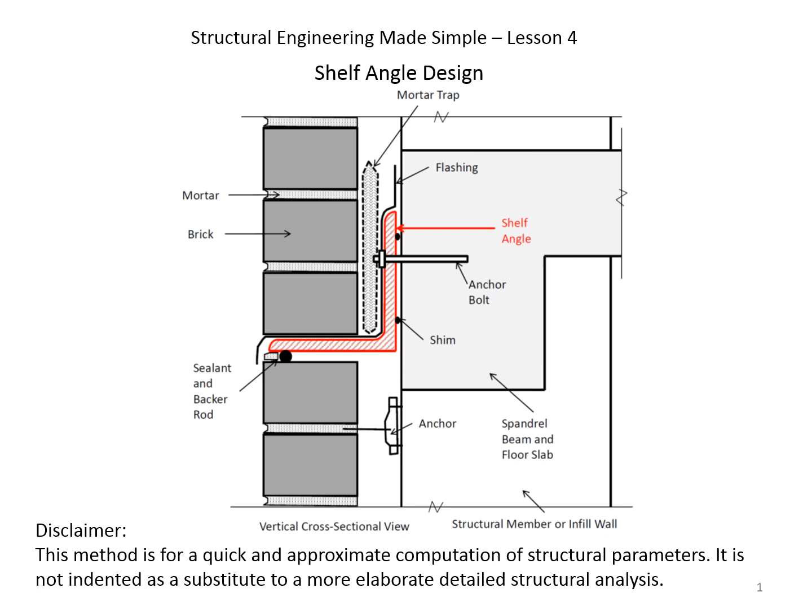Shelf angles, also referred to as steel relief angles, are secured to the structural system and are designed to provide support for facades such as veneer walls. Usually they are installed at every other floor level. Therefore, each shelf angle carries the weight of 2 stories of the veneer wall.

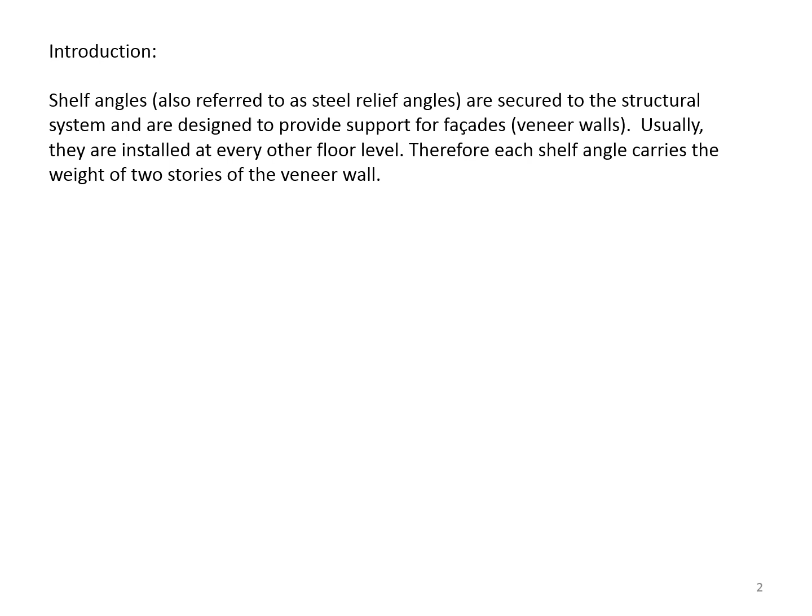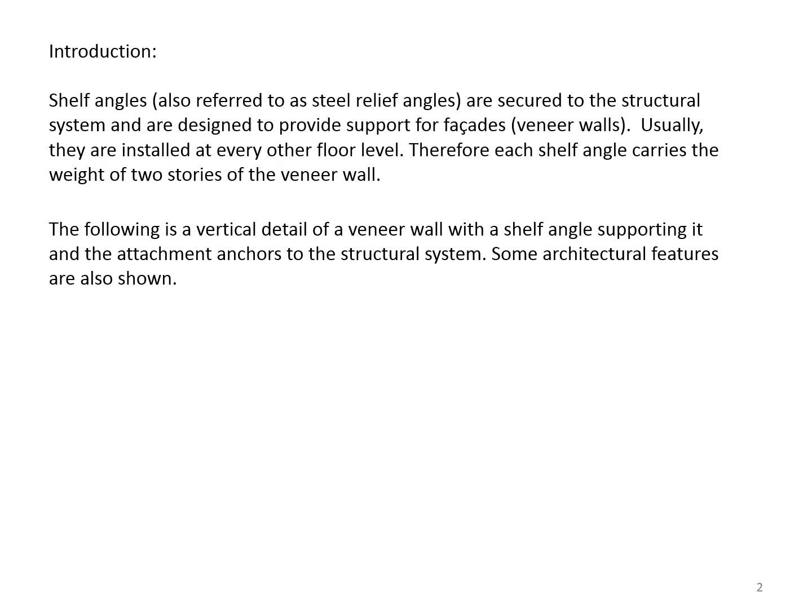The following is a vertical detail of a veneer wall with a shelf angle supporting it, and the attachment anchors to the structural system. Some architectural features are also shown. Here is a shelf angle shown in red, and the anchor bolt securing it to the structural system. Architectural features shown are the sealant and backer rod, the flashing, and the anchor to prevent wall movement.

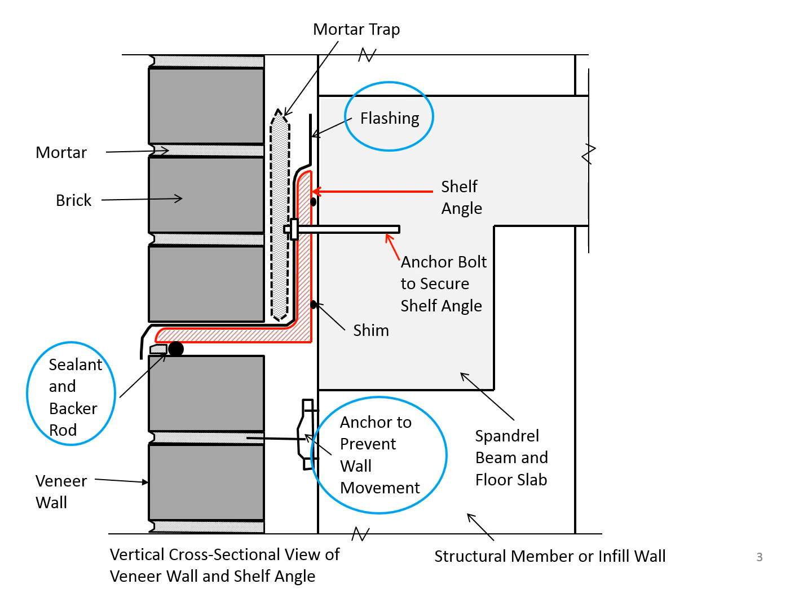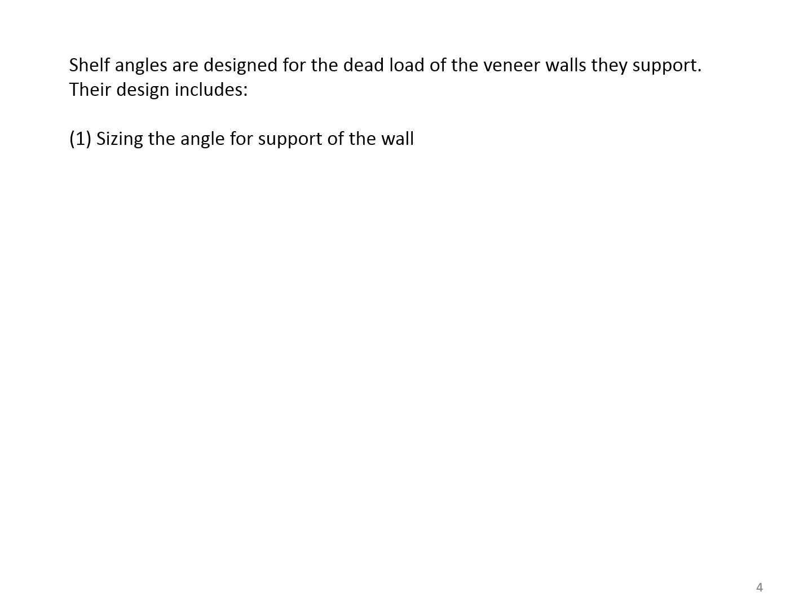Shelf angles are designed for the dead load of the veneer walls they support. Their design includes sizing the angle for support of the wall, designing the angle for proper thickness, and designing for the connection that attaches the angle to the structural system.

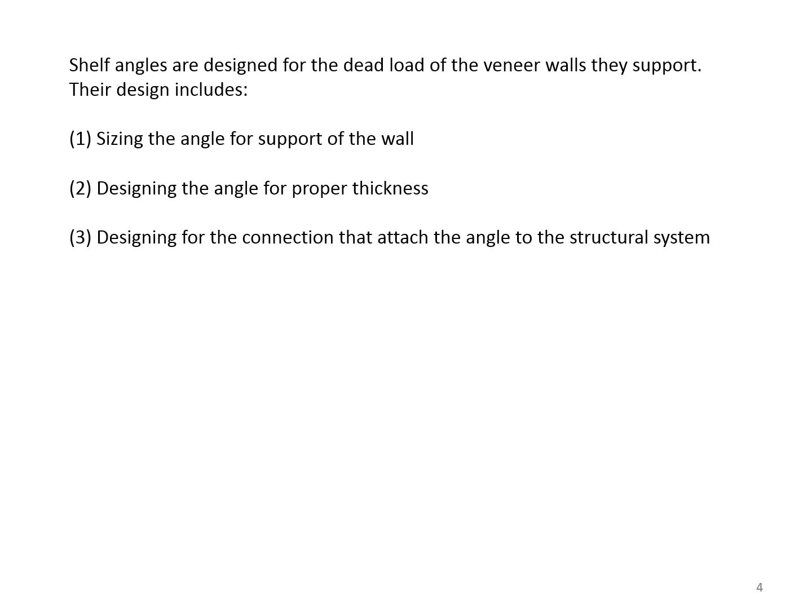When the supporting structural system is a masonry wall or a reinforced concrete frame, the attachment of the angle to the structure is achieved by using anchor bolts. Proper design of the anchor bolts requires selecting the anchor cross-section diameter, embedment length, and the spacing between anchors.

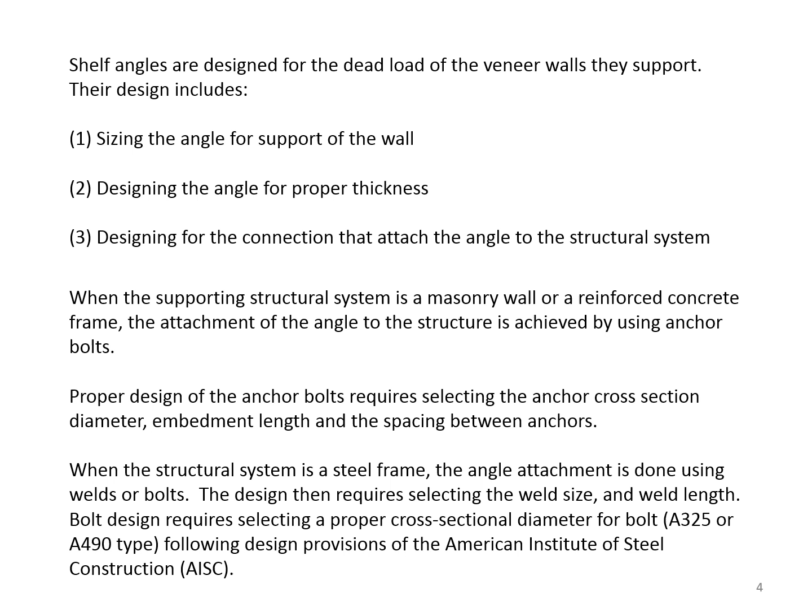When the structural system is a steel frame, the angle attachment is done using welds or bolts. The design then requires selecting the weld size and weld length. Bolt design requires selecting a proper cross-sectional diameter for bolt, A325 or A490 type, following design provisions of the American Institute of Steel Construction, AISC.

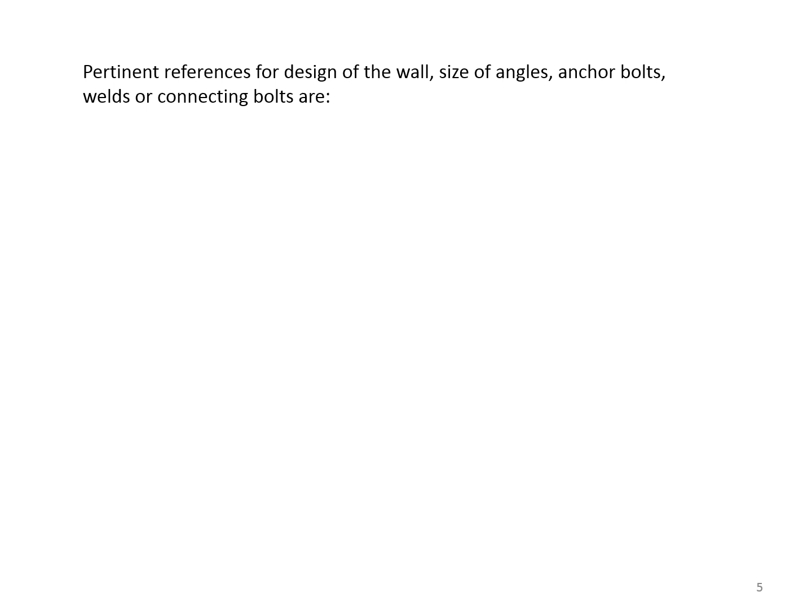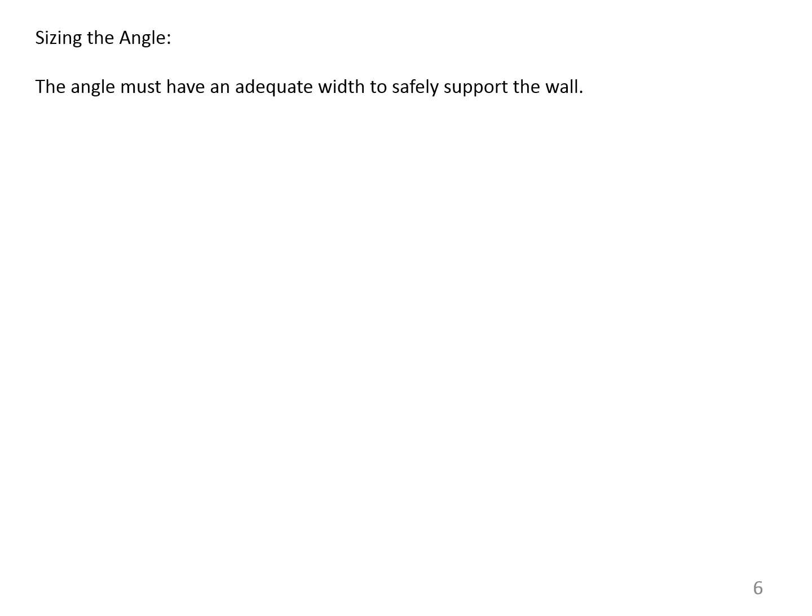Sizing the angle. The angle must have an adequate width to safely support the wall. In the longitudinal detail shown below, notice that the weight of the masonry wall is treated as a uniformly distributed load. The anchor spacing is S, and the edge distance, that is the distance between the center of the last anchor and the end of the shelf angle, is shown with S sub E.

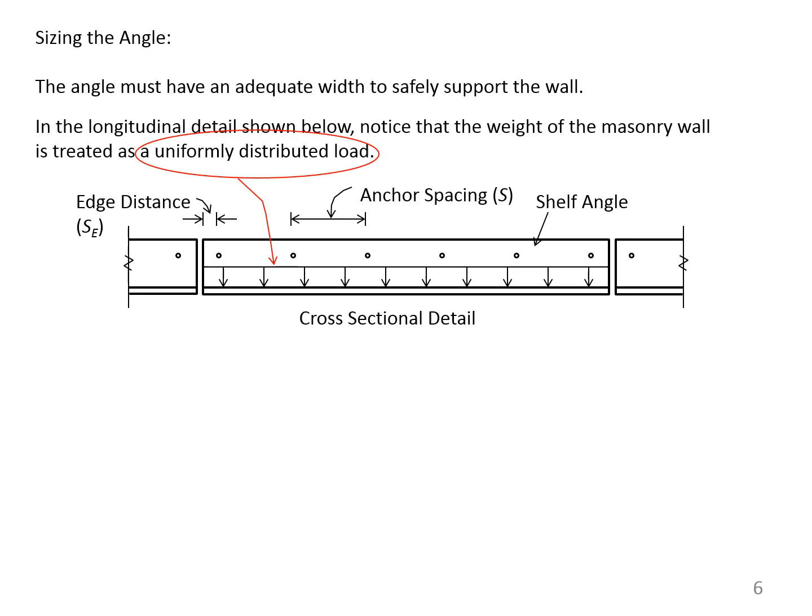And here is the cross-sectional detail of the shelf angle. Notice that the load from the weight of the wall is acting at the tip of the outstanding leg of the angle. We're going to talk about this a little bit more later. Also notice the forces in the angle. There is a tension in the anchor and there is a shear in the anchor. Furthermore, there is a compression at the bottom on the support.

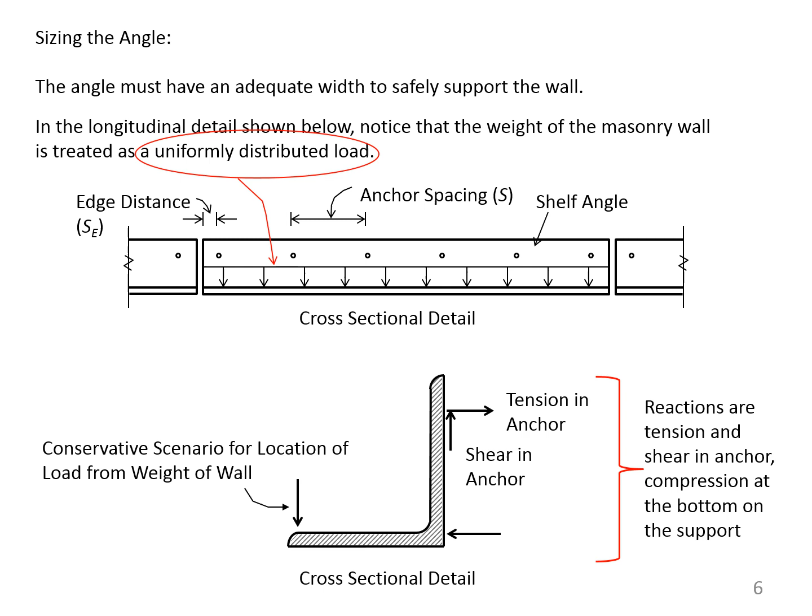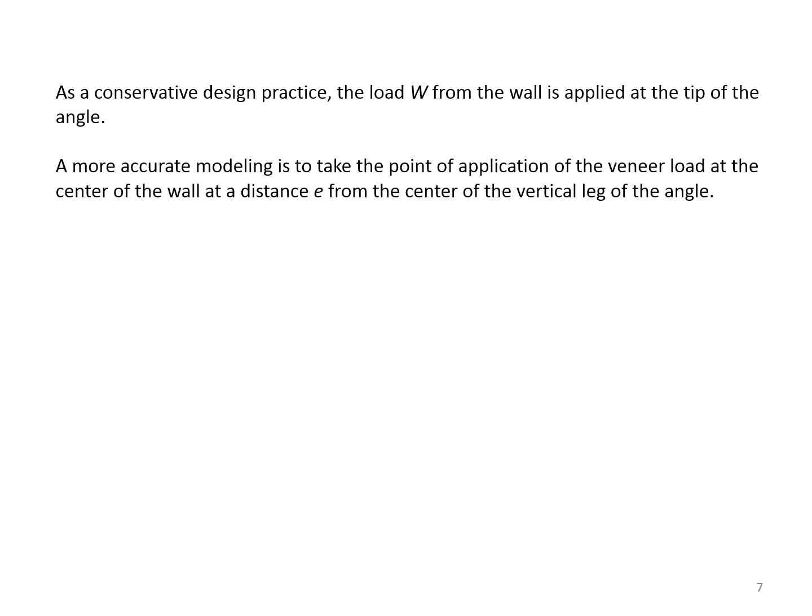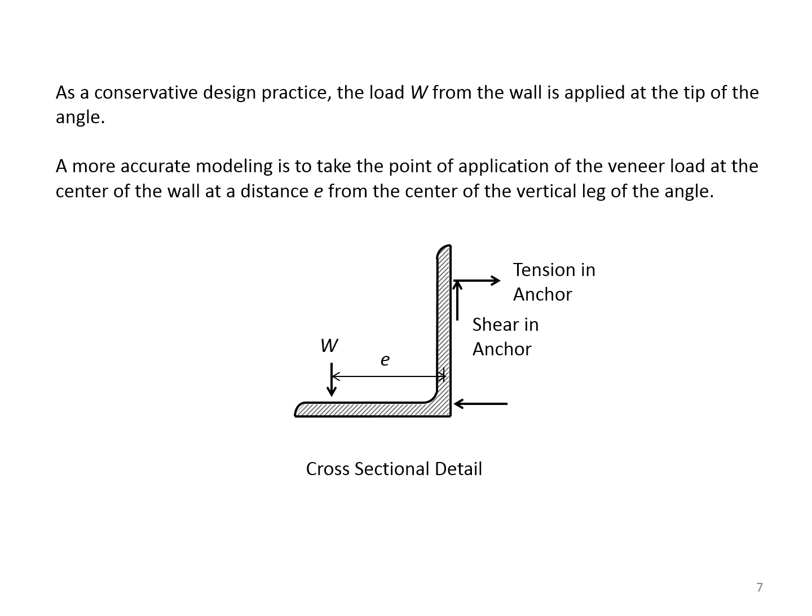As a conservative design practice, the load W from the wall is applied at the tip of the angle. A more accurate modeling is to take the point of application of the veneer load at the center of the wall at the distance E from the center of the vertical leg of the angle. This is shown in this figure. Therefore, the determination of dimension E is important.

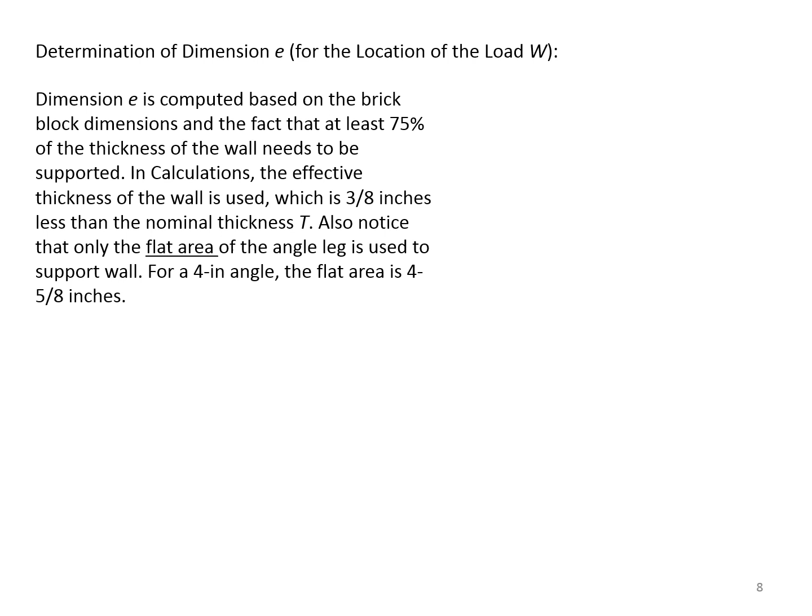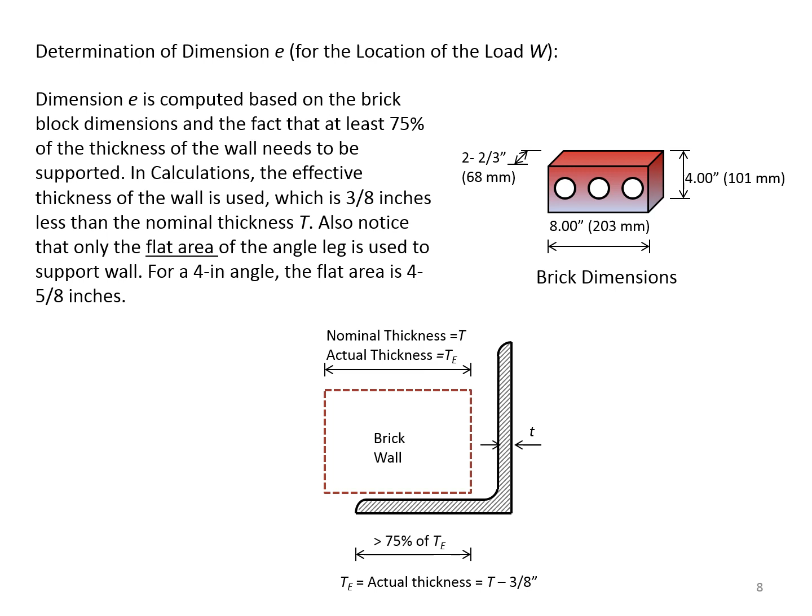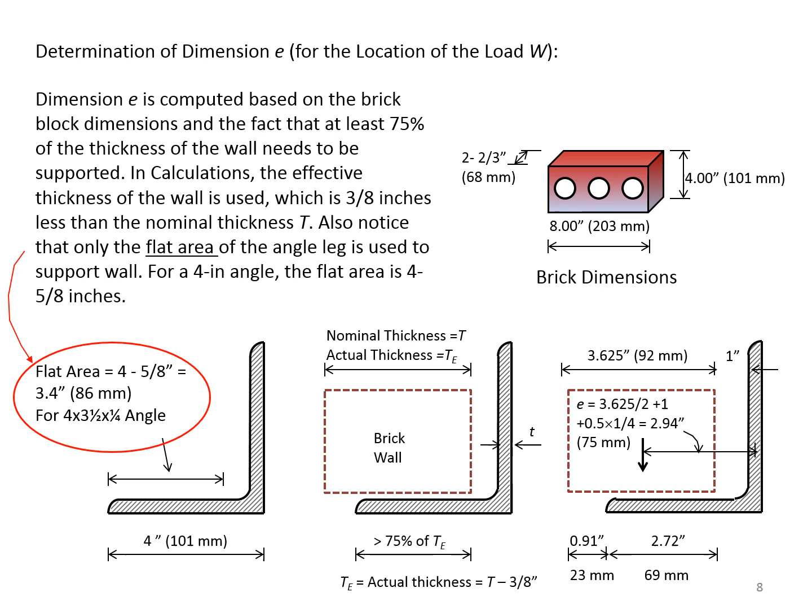Finally, when we put these numbers together, we should be able to determine that dimension E. We're going to talk about this a little bit more. So again, for the 4-inch angle, in the example we provided, considering that the 75% of the effective thickness needs to be supported, we can compute and find out whether we have enough area, the flat area, to be able to accommodate the 75%. The effective width of the wall is 4 minus 3/8 of an inch, so it's 3.625 if it is a 4-inch thick wall.

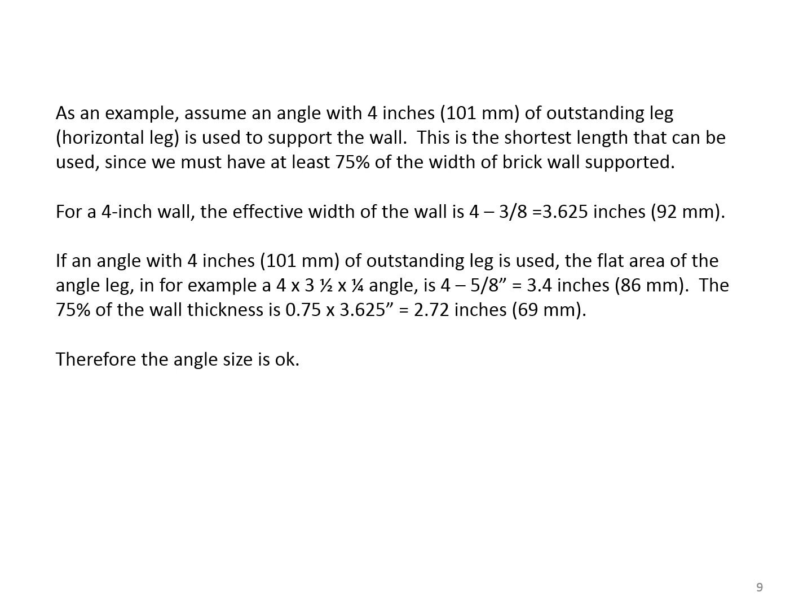If an angle with 4 inches of outstanding leg is used, the flat area of the angled leg is 4 minus 5/8 of an inch, which is 3.4 inches. 75% of the effective wall thickness is 0.75 times 3.625, which is 2.72 inches. Therefore, you notice that the angle is okay. We only need 2.72 inches and we have 3.4 inches of area.

However, this condition provides only a very small gap area between the veneer wall and the inner faces of the vertical leg of the angle, about 1 inch. In practice, this gap is wider and is about 2 inches. In this situation, certainly a larger angle size, for example, an angle with 6 inches of horizontal leg, will be needed.

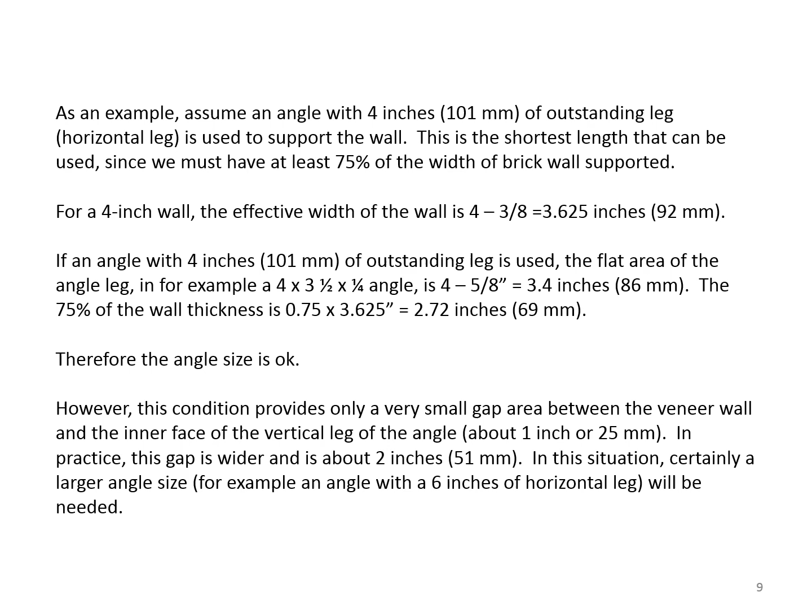Here we provide the detail again, and you notice how the 2.94 is computed. Please notice that this dimension is measured from the center of the thickness of the vertical leg of the angle.

Also, if you are looking for this dimension, 5/8 of an inch, to compute the flat area of the angle, for other size angles you need to consult with the AISC manual.

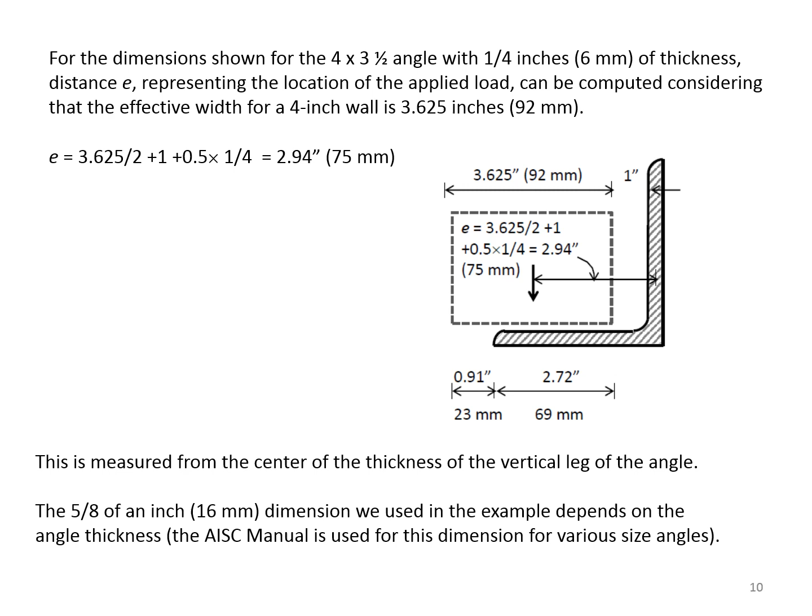In general, if a cavity gap equal to little c is used for an angle thickness equal to little t, and the effective wall thickness of t sub e, the distance e is te divided by 2 plus c plus t over 2. Obviously, with a larger cavity gap, the size of the angle will need to increase.

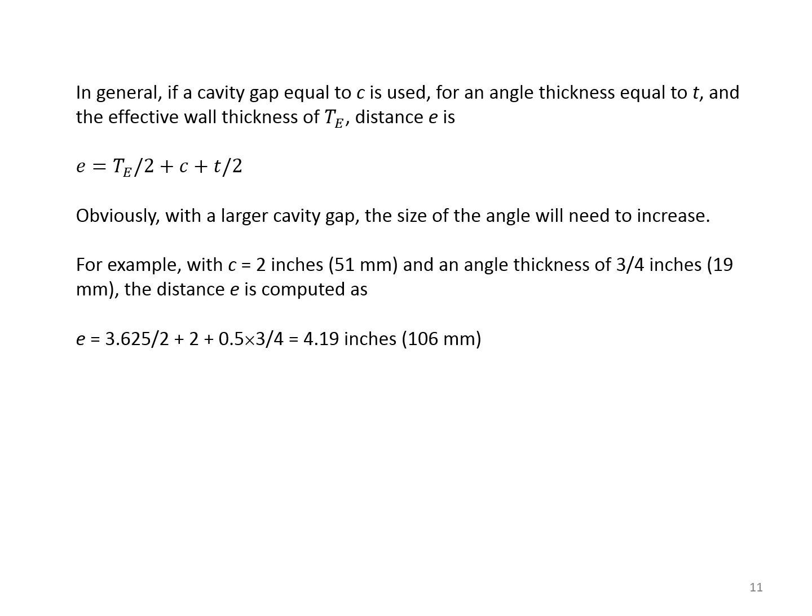For example, with c equal to 2 inches and an angle thickness of 3/4 of an inch, the distance E is 4.19 inches, and certainly we need at least an angle with outstanding leg of 5 or 6 inches to accommodate this.

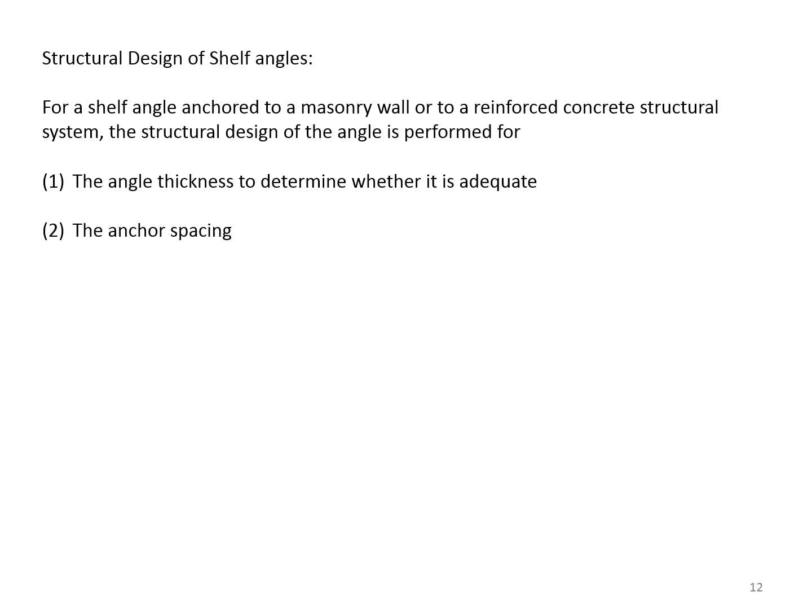Structural design of shelf angles. For a shelf angle anchored to a masonry wall or to a reinforced concrete structural system, the structural design of the angle is performed for the angle thickness to determine whether it is adequate, the anchor spacing, and the size and embedment length needed for anchor bolts. In this video, we only cover items 1 and 2.

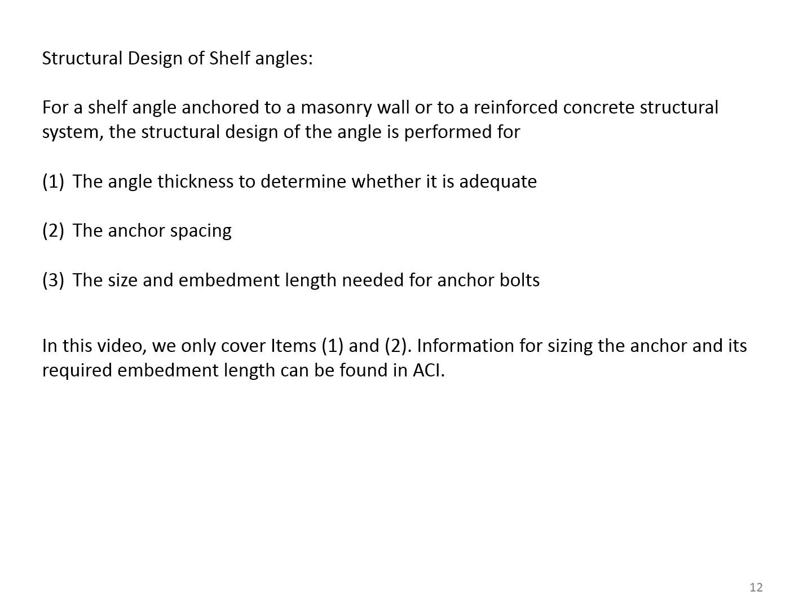Information for sizing the anchor and its required embedment length can be found in documents from American Concrete Institute, ACI.

Here is a detail showing design parameters for a shelf angle. Notice that the total load is a uniformly distributed load over the length B, which is equal to 4T. B is the effective length of the angle. It is taken as 4 times the thickness of the wall. However, it cannot exceed S, which is the spacing between the anchors.

To the right, you notice another detail showing a cantilever system. This is a cantilever idealization of the outstanding leg of the angle. We use this one in order to determine the required thickness of the angle. The cross-sectional area of this cantilever is a rectangular area b times t. t is the thickness of the angle.

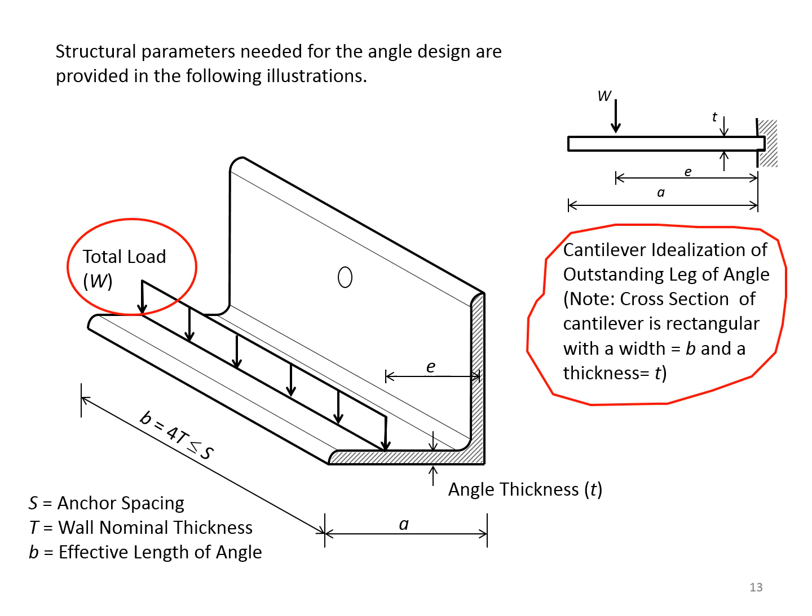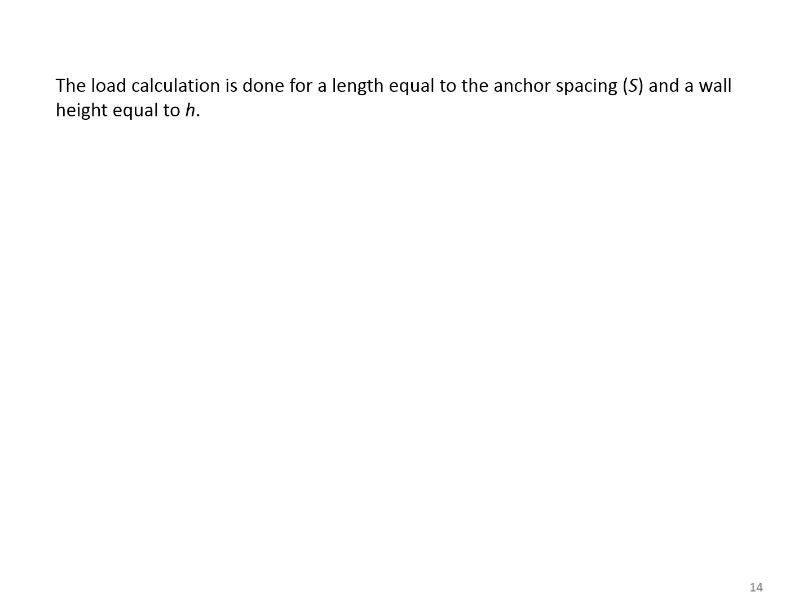And also notice that the load, which was acting at the tip of the angle, is now moved to an inner area at the distance E from the support. The load calculation is done for a length equal to the anchor spacing S and a wall height equal to H. However, calculation of all cross-sectional properties are conducted for an effective angle length of B. And as we indicated before, B is equal to 4 times T limited by S.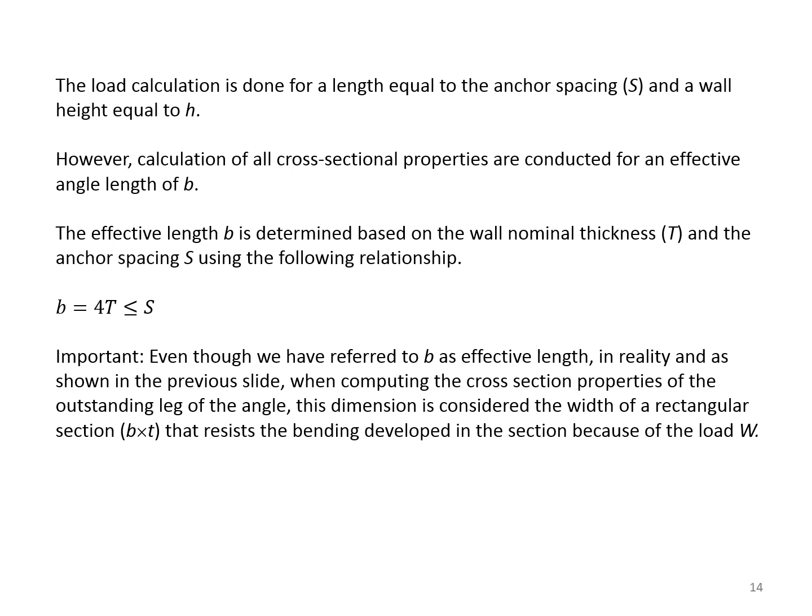This is an important point to remember. Even though we have referred to B as effective length, in reality, and as shown in the previous slide, when computing the cross-sectional properties of the outstanding leg of the angle, this dimension is considered the width of a rectangular section B times T that resists the bending developed in the section because of the load W.

And again, notice that for the purpose of computing the required thickness of the angle, the outstanding leg of the angle is treated as a cantilever beam under the load W.

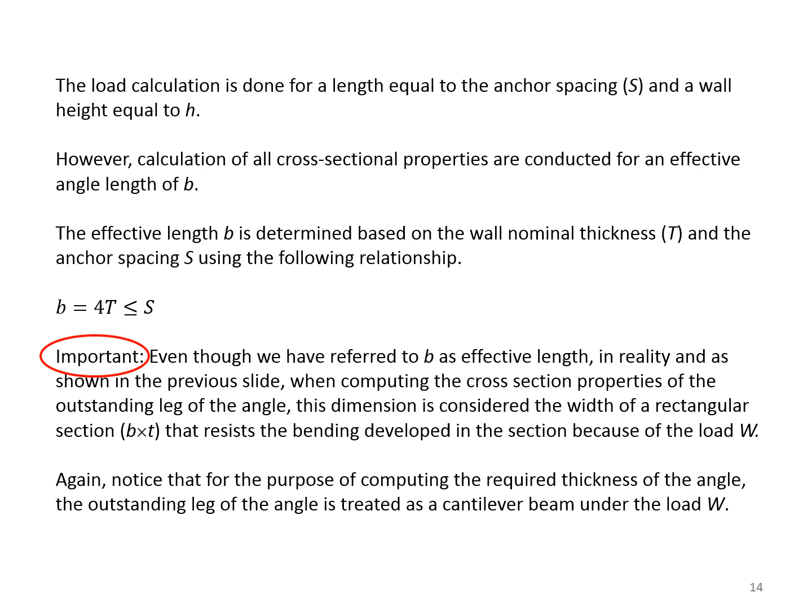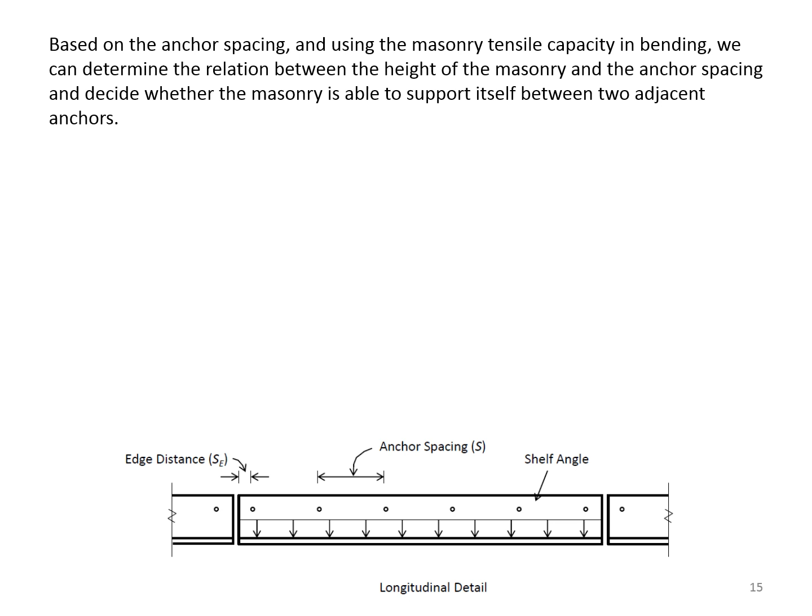Based on the anchor spacing and using the masonry tensile capacity in bending, we can determine the relation between the height of the masonry and the anchor spacing and decide whether the masonry is able to support itself between two adjacent anchors. As was shown in the longitudinal detail, which is again presented below in a smaller scale, the wall weight is a linear load assumed uniformly distributed.

Considering a wall with a height of h spanning over a distance s between two adjacent anchors, the uniform load from the wall and the bending moment developed are: the load is q equal to omega h, bending moment m is equal to q s squared over 8, which is equal to omega h s squared over 8. In these equations, little omega is the wall density, and for a 4-inch thick wall is usually around 42 pounds per square foot, and h is the wall height.

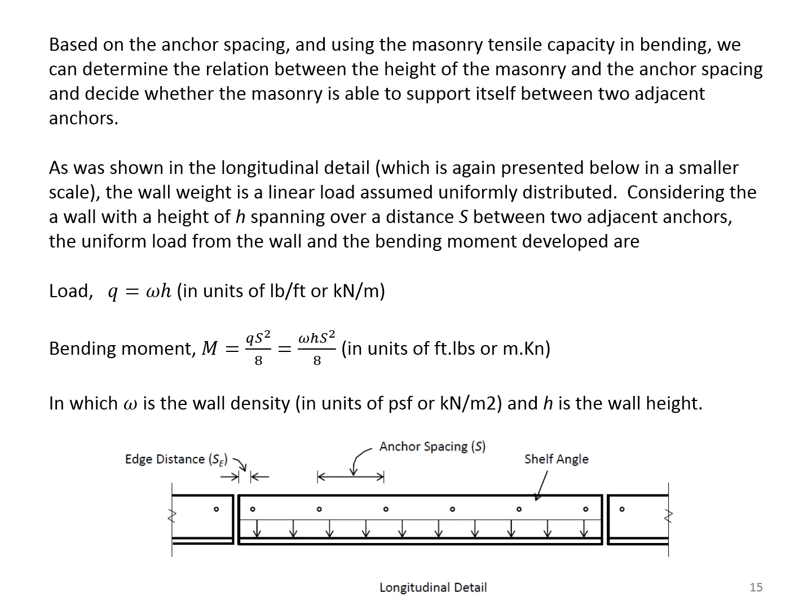Notice that the wall vertical cross-section will resist this bending moment M. For a wall with nominal thickness T, the effective thickness Te is T minus 3/8 of an inch, and the section modulus would be Te h squared over 6.

The bending stress at the vertical cross-section of the wall, which would be affecting the mortar, is little fb equal to M over Sx, which is equal to 6 omega s squared divided by 8 Te h.

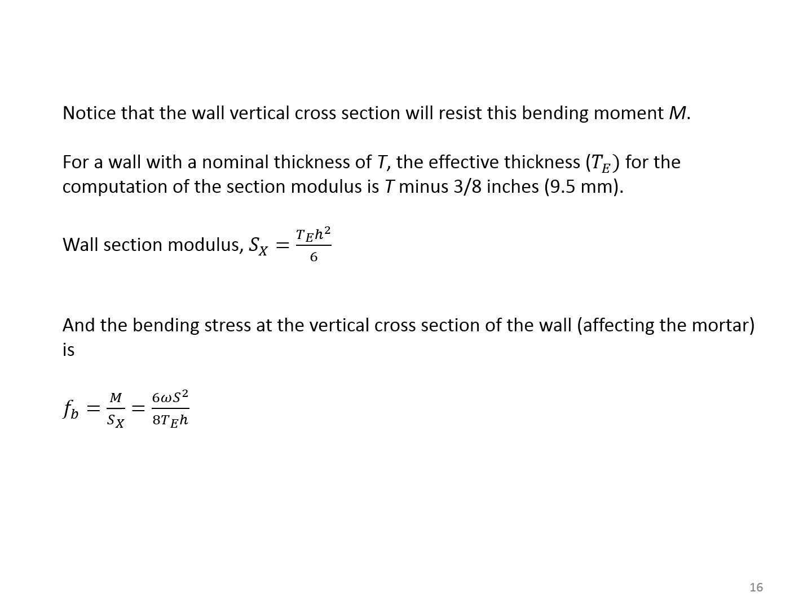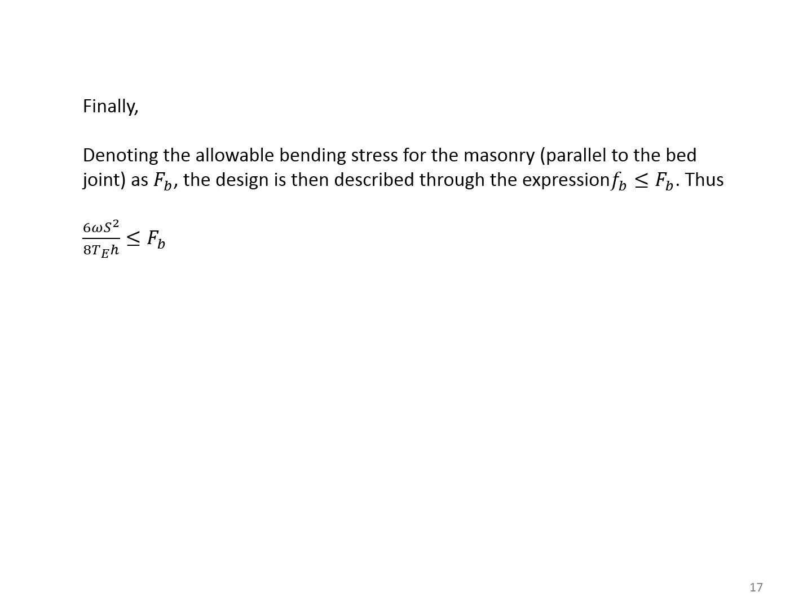Finally, denoting the allowable bending stress for the masonry parallel to the bed joint as capital FB, the design is described through the expression little fb smaller or equal to capital FB. Therefore, 6 omega s squared over 8 Te h is less than FB. Solving this inequality for s results in the following equation for the maximum limit for the anchor spacing.

In other words, the maximum opening span to allow for the veneer to support itself. S is limited by the square root of 8 Te h FB divided by 6 omega.

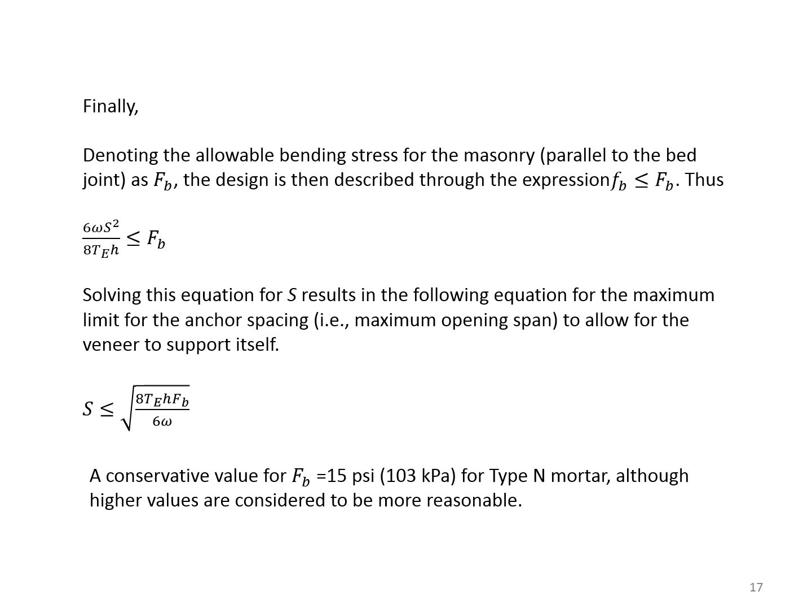A conservative value for FB is 15 psi for type N mortar, although higher values are considered to be more reasonable.

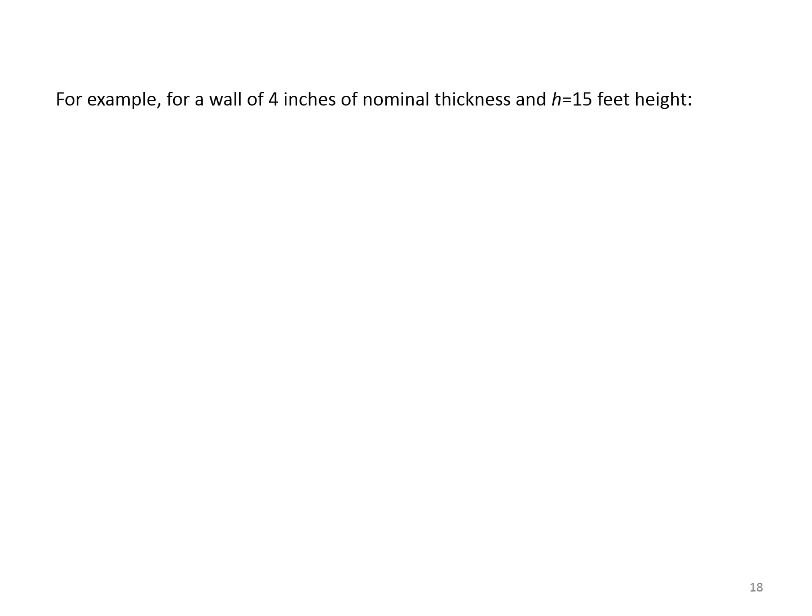For example, for a wall of 4 inches of nominal thickness and h equal to 15 feet high, as we indicated, the effective wall thickness would be 3.625 inches.

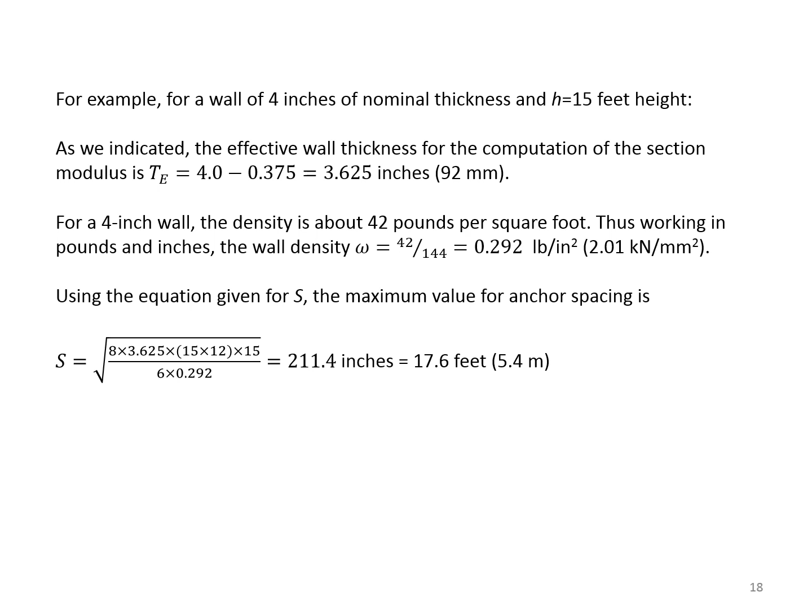And with a density of 42 pounds per square foot, working in inches and pounds, the density would be 0.292 pounds per square inch. Using the equation for S, we find that the limit for S is equal to 17.6 feet.

This means the wall is able to support itself over a length of 17.6 feet. The spacing that we select for the anchors will need to be less than this limit.

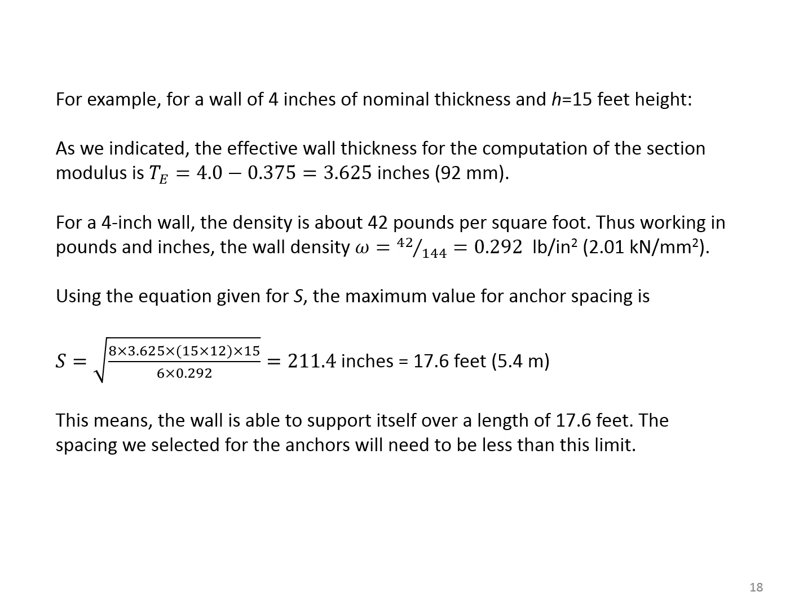As seen in the detail below, a portion of the wall will cantilever itself where the last anchor is located, denoting the distance between the center of the last anchor to the edge of the angle as Se.

The wall moment over this cantilever is M equal to q Se squared over 2, which is equal to omega h Se squared over 2, and the corresponding stress would be M over Sx, which is 3 omega Se squared divided by Te h, and this has to be less than capital FB.

Again, solving for Se, we find that the limit for Se is the square root of Te h FB divided by 3 omega. For example, if an edge distance equal to 1 foot is used, using the previous values for Te, h, omega, and FB, this equation results in...

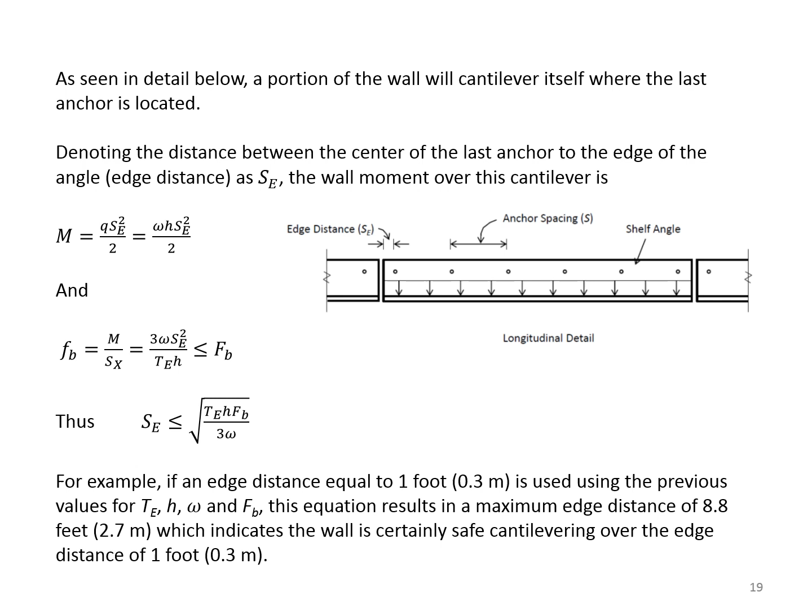...a maximum edge distance of 8.8 feet, which indicates that the wall is certainly safe cantilevering over the edge distance of 1 foot.

For determining an appropriate angle thickness to support the weight of the wall, the outstanding leg of the angle is treated as a cantilever beam, as we indicated earlier. Again, we are showing the detail here.

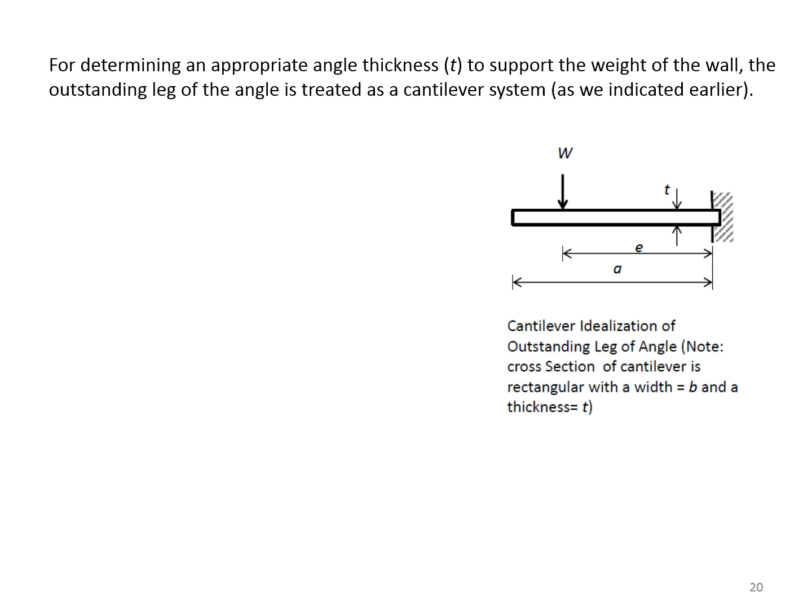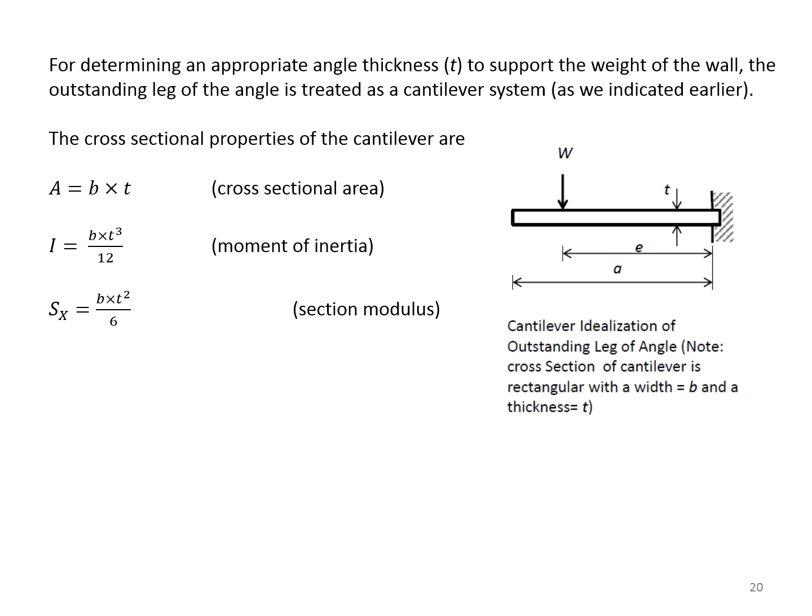The cross-sectional properties of the cantilever are: area is b times t, moment of inertia is b t cubed divided by 12, and section modulus is b t squared over 6.

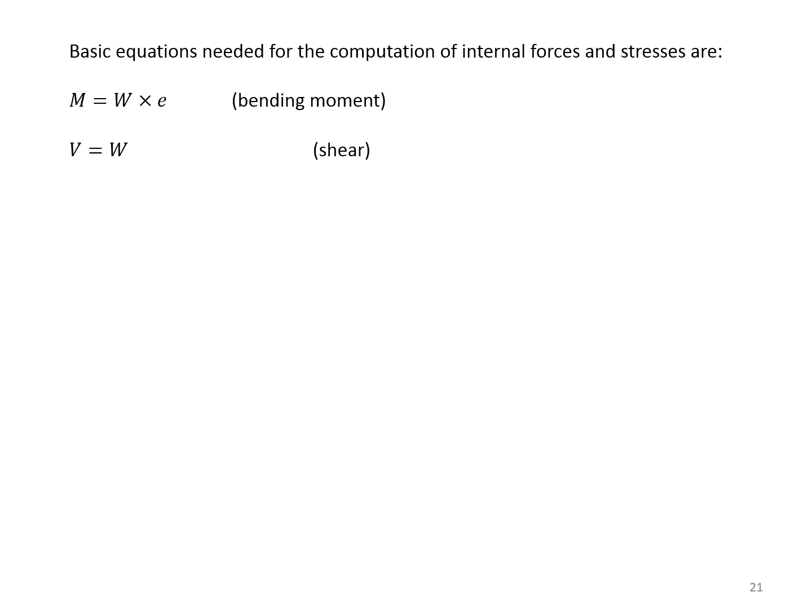Basic equations needed for the computation of internal forces and stresses are: moment is W multiplied by E, shear is W, and the deflection is W A squared over 6EI times 3A minus E. This is the deflection at the tip of the angle.

The applied stress is M over Sx. The applied shear is 3V over 2A. And the design is generally done for bending moment.

Once an appropriate thickness for the angle is selected, it is then checked for shear and deflection. However, we would like to indicate that shear is usually not critical.

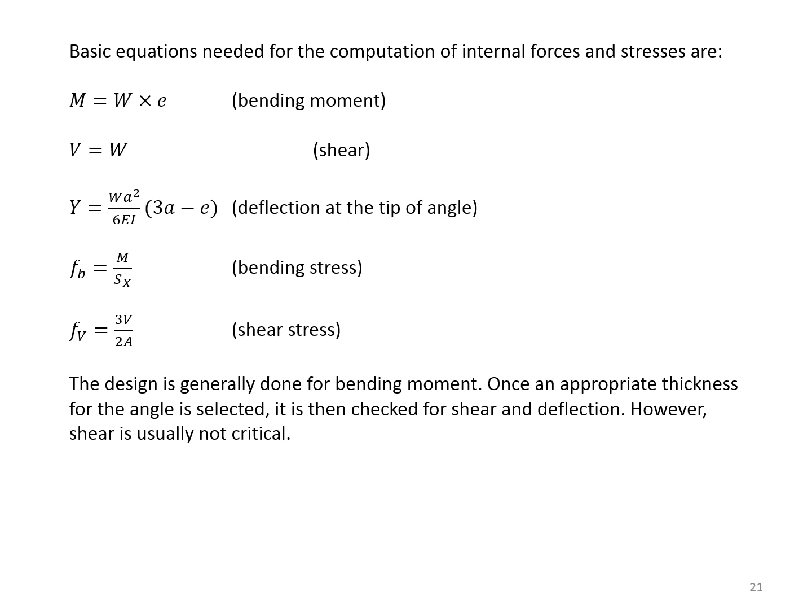Using the load and resistance factor design, LRFD method, the design equation is represented by Mu less than or equal to phi Mn.

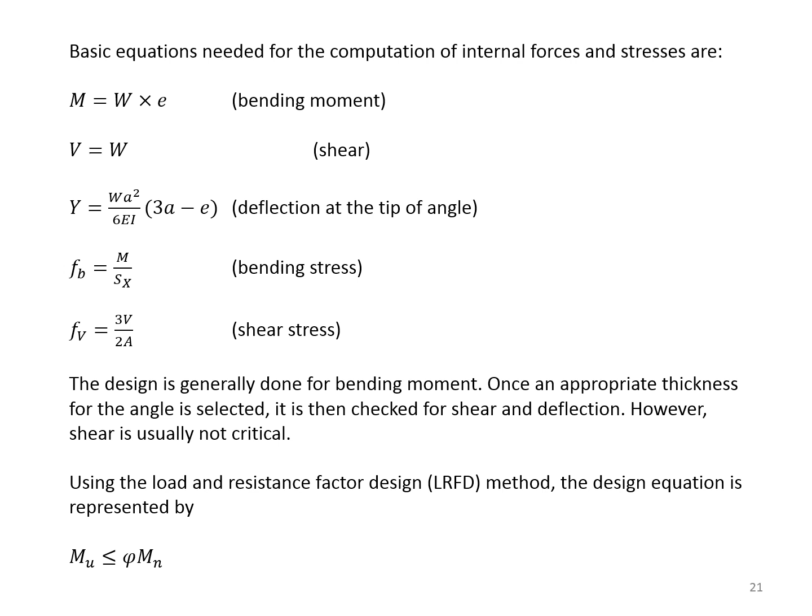Mu is the factored applied moment, Mn is the nominal bending capacity, and phi is a capacity reduction factor, which is taken as 0.9 for flexure.

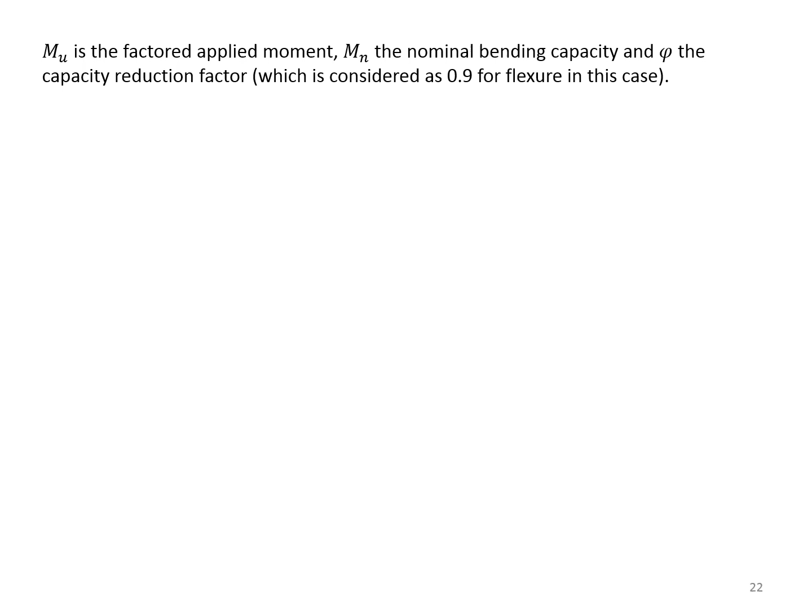Since the weight from the wall is all dead load, using a load factor equal to 1.4, the factored applied moment is Mu equal to 1.4 W times E.

However, in computing W, we do some modifications. We are also going to add the weight of the outstanding leg of the angle to the total load.

Therefore, W is omega times H plus QA multiplied by S, for a wall height of H. Little omega again is the wall density, and QA is the weight of the horizontal leg of the angle in units of pounds per foot.

Finally, the nominal bending capacity, considering the yield capacity of steel Fy, would be from the following equation: Mn equal to Fy times Sx.

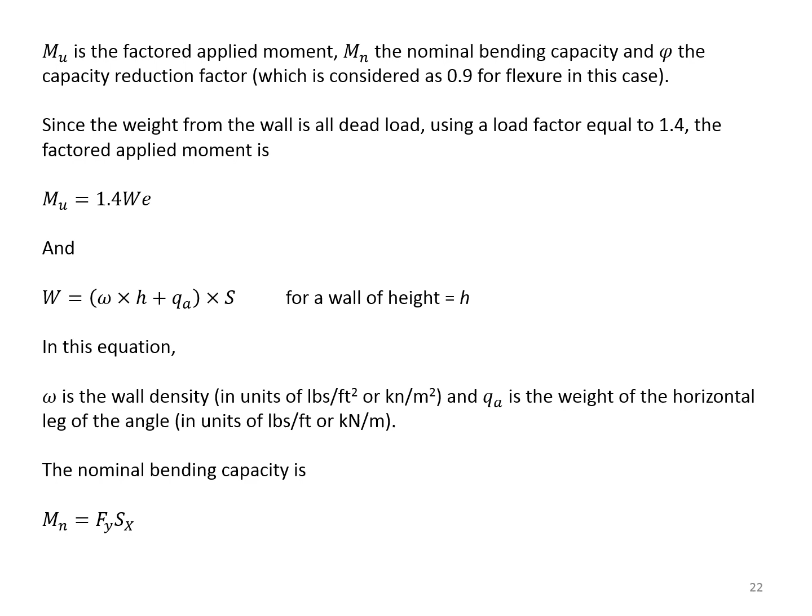Using the design equation Mu less than or equal to phi Mn, we can show that an equation for the angle thickness is T larger or equal to square root of 8.4 times omega times H plus QA, then quantity multiplied by S and multiplied by E divided by phi Fy B.

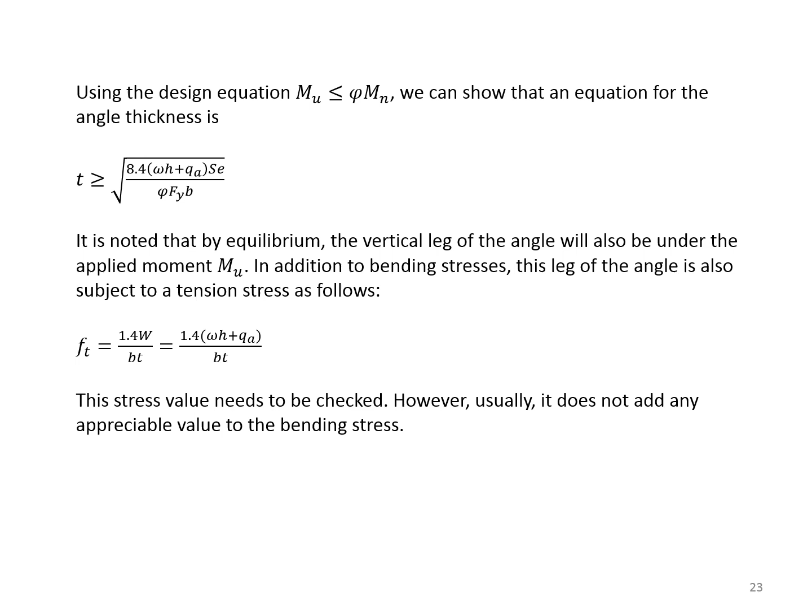It is noted that by equilibrium, the vertical leg of the angle will also be under the applied moment Mu. In addition to the bending stresses, this leg of the angle is subject to a tension stress as follows: ft equal to 1.4 W divided by Bt, which is equal to 1.4 times omega H plus QA divided by Bt. This stress value needs to be checked. However, usually it does not add any appreciable value to the bending stress.

Now let's look at an example. We have an angle 6 by 6 by half an inch used as a shelf angle to support a 4-inch veneer wall of 13 feet 4 inches in height. The cavity gap is 2 inches.

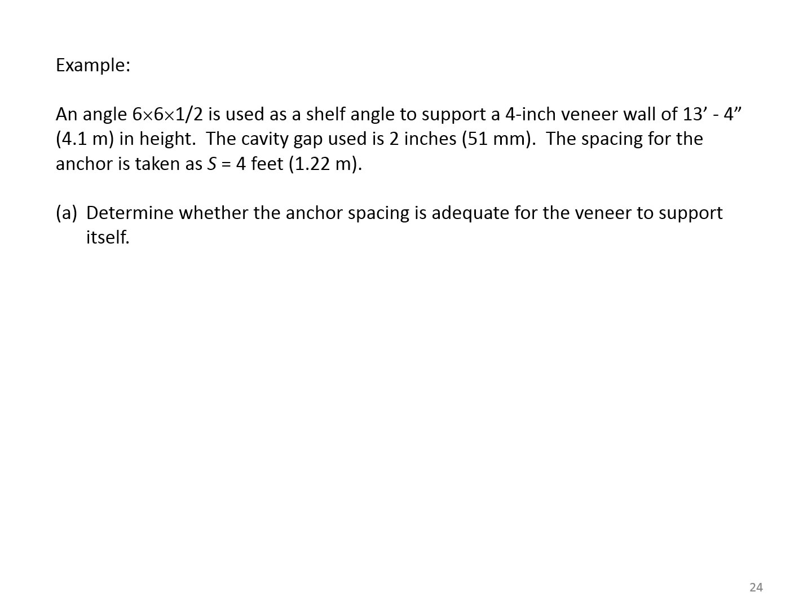The spacing for the anchor is taken as 4 feet. Therefore, S is equal to 4. We want to determine whether the anchor spacing is adequate for the veneer to support itself. We also would like to determine whether the angle thickness is adequate. We want to compute the additional tensile stress developed in the angle's vertical leg. And finally, we want to compute the deflection at the tip of the outstanding leg of the angle.

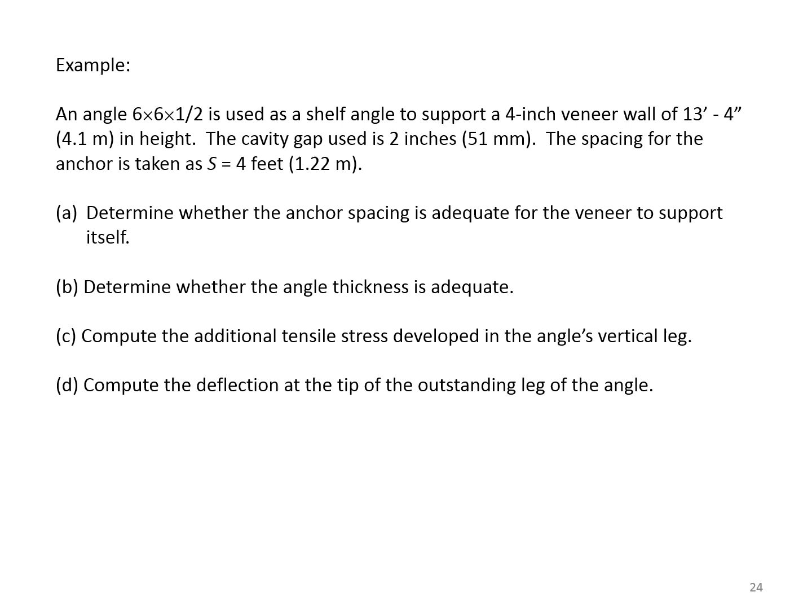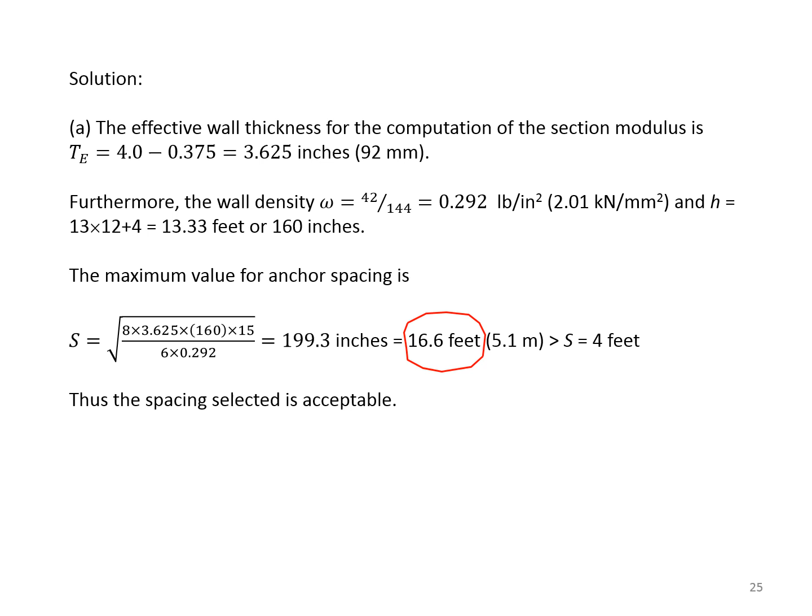So we know that the effective thickness for a 4-inch thick wall is 3.625. Furthermore, the density would be 0.292 pounds per square inch, and H would be equal to 13.33 feet, or 160 inches. Plugging these numbers in the equation for S, we end up with 16.6 feet, which certainly is larger than S equal to 4, so the spacing selected is acceptable.

We continue with the rest of the problem. The effective length of the angle B is 4 times 4, in other words, 4 times the thickness of the wall, so it is 16 inches. The angle selected has a total weight of 19.6 pounds per foot. Therefore, Q sub A is 19.6 divided by 2, which is 9.8 pounds per foot.

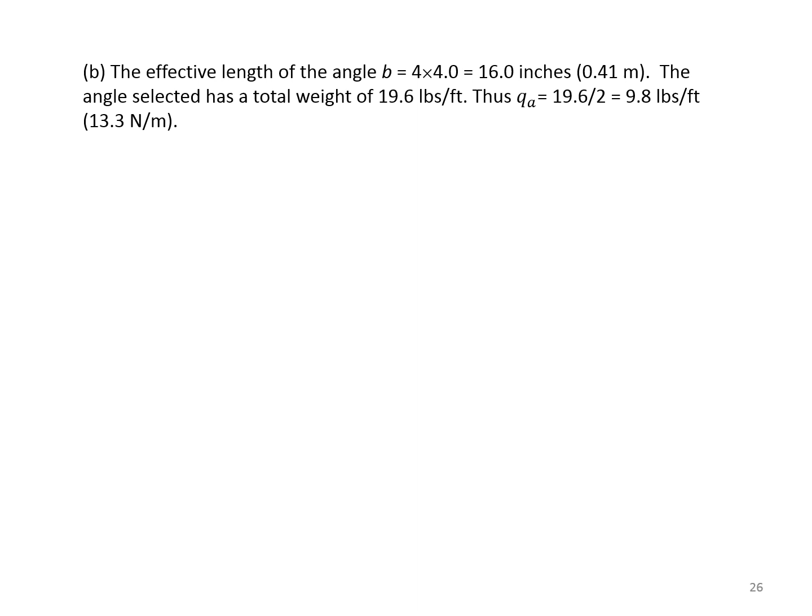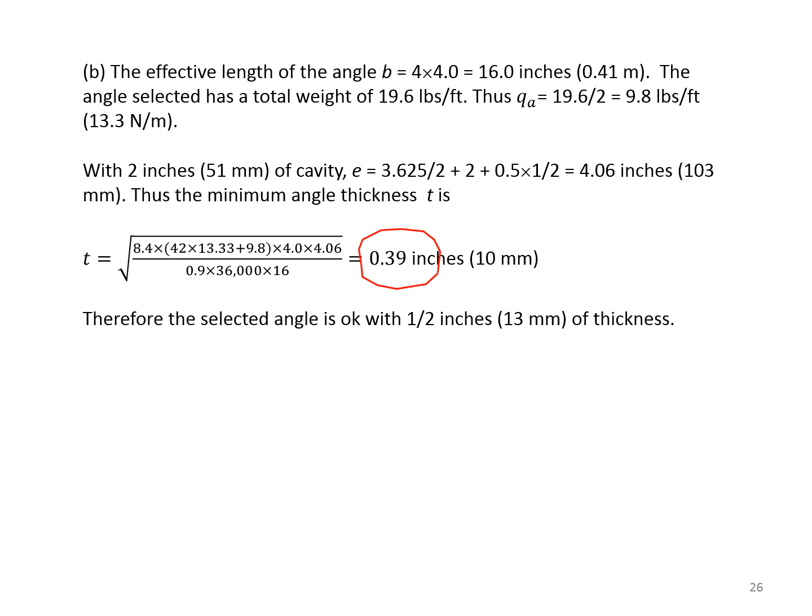With 2 inches of cavity gap, E is equal to 4.06 inches. And plugging these in the equation for the thickness that was given before, we end up with 0.39 inches of thickness. And because the angle has half an inch thickness, therefore our design is okay.

Continuing with the problem, the factored additional tensile stress in the vertical leg of the angle is obtained from the equation that we gave for Ft and turns out to be 399 psi, and this value is really negligible compared with the factored bending stress.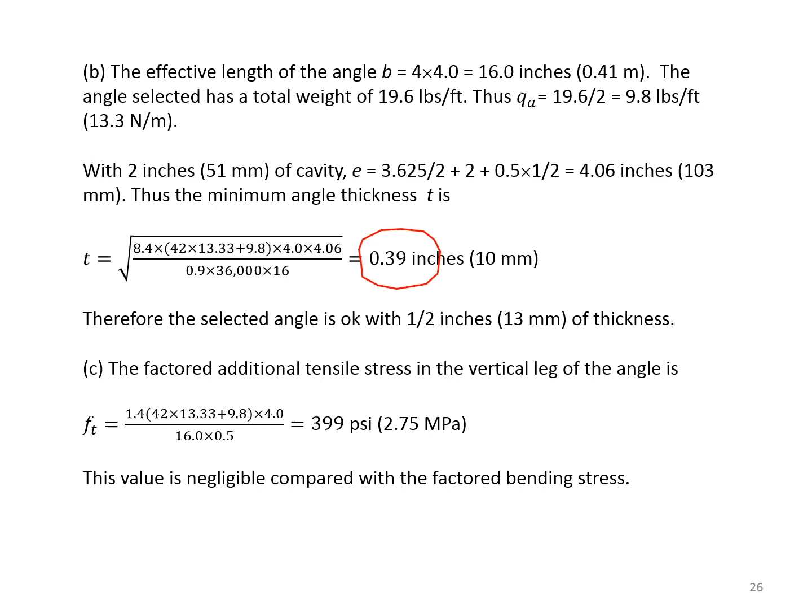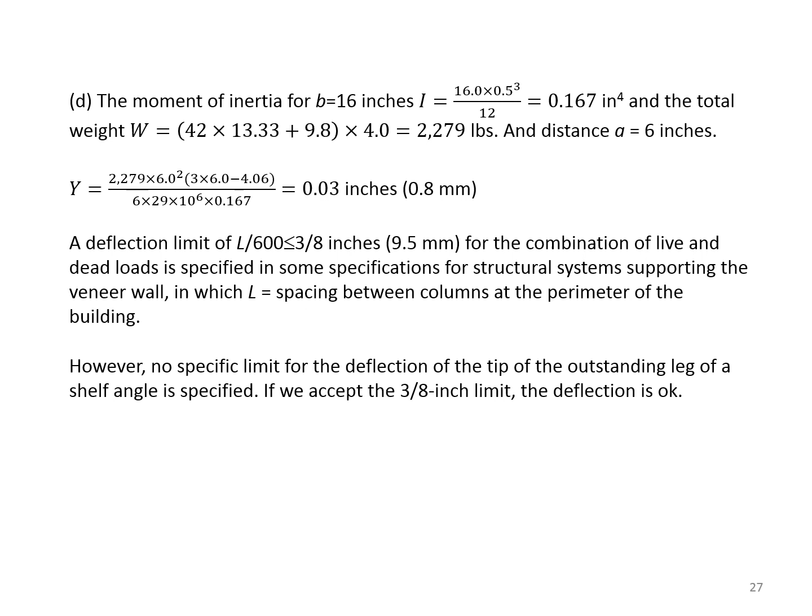As a continuation of this series on shelf angle design, we must consider designing the anchors as well. Anchors are designed for their diameters and embedment length. Most anchors available today are off-the-shelf products by several manufacturers. These manufacturers often provide technical assistance and specifications for design of their products.